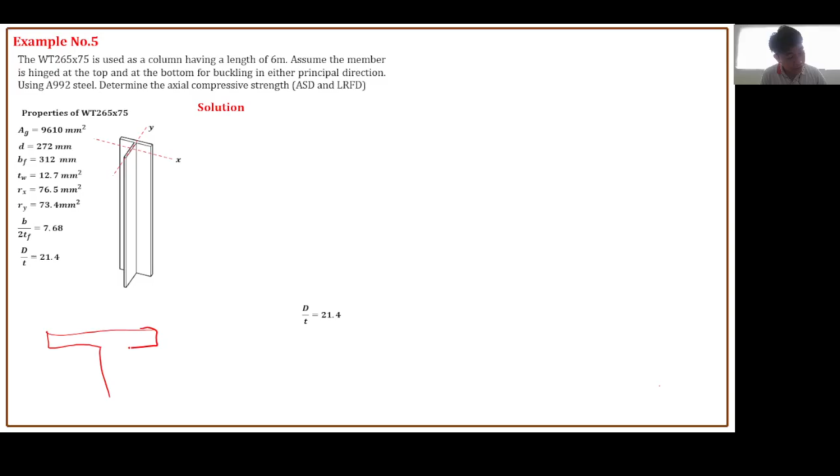And this is the overall depth over its thickness, or the thickness of the web. Okay, so now before we compute the compressive strength, let's compute first the width to thickness ratio of each element. So anyway, we have two types of element here: the flange and then the web.

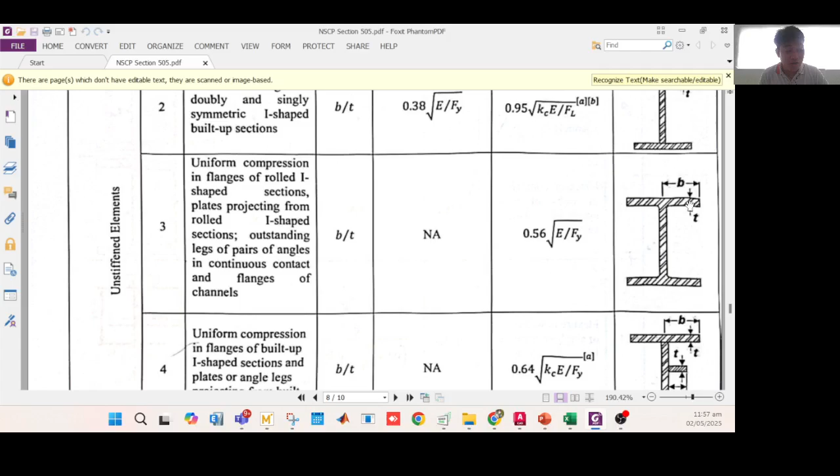For the flange, we are going to use case number 3 of this table, because from this table we can project a letter T from this letter I, or W section. So we are going to compute the B over T of the flange. As you can see here, that is half of the flange over the T, but the standard already provides the B over 2 times the thickness of the flange, or base flange. This should be base flange over 2 times the thickness of flange. You can check that on the standards.

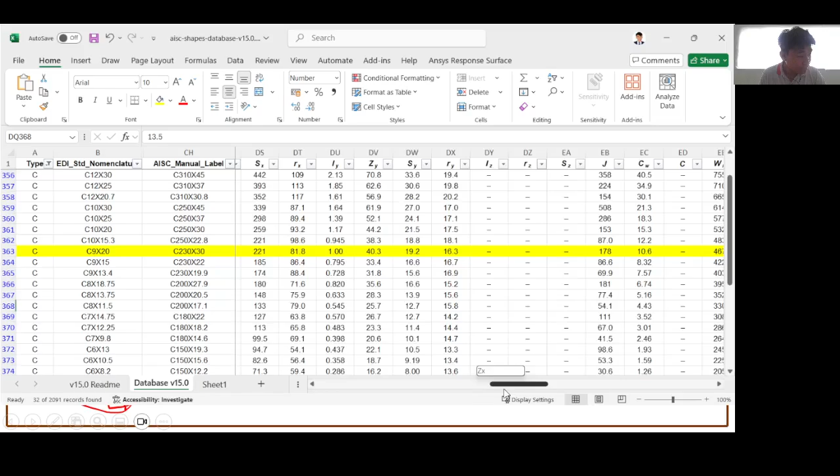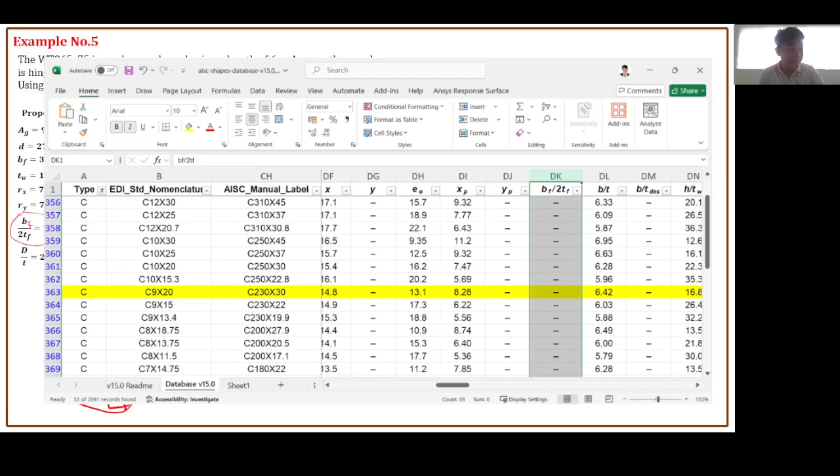So that is there. Okay, so this one, BF over 2TF. So this is the value from the table, and we are going to compare that to the NSCP provision, which is 0.56. Now, if this B over T exceeds the lambda R, meaning the section is slender. However, if this B over T does not exceed 0.56 square root of E over Fy, then it is non-slender.

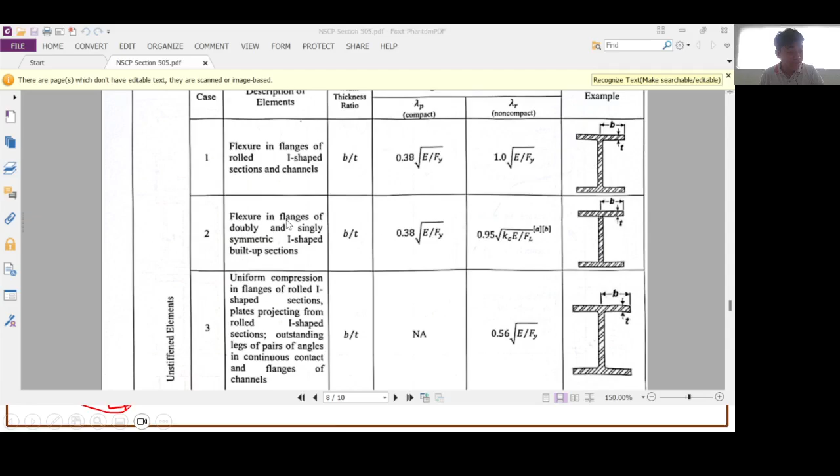Okay, so we're going to compute this BF over 2TF and compare it to this limiting width to thickness ratio. So anyway, for the web, we also have to check since the web is also an unstiffened element. That is under case number 8 of the NSCP. So uniform compression. This case 7 is for flexure, but we're analyzing compression members, so we need case number 8.

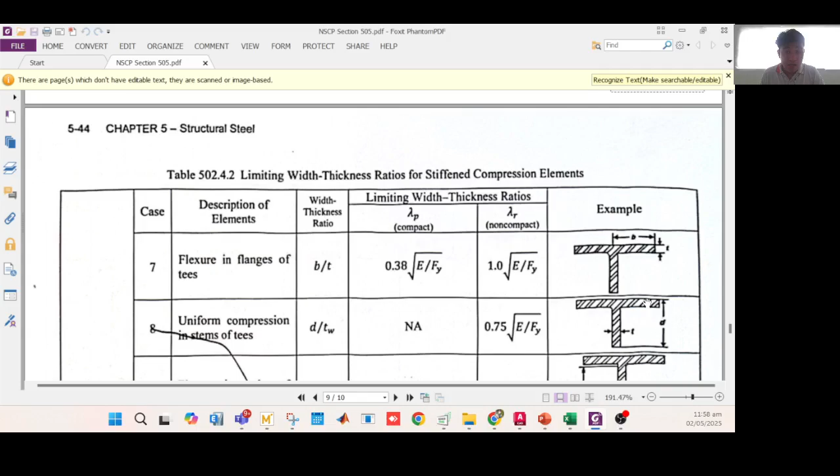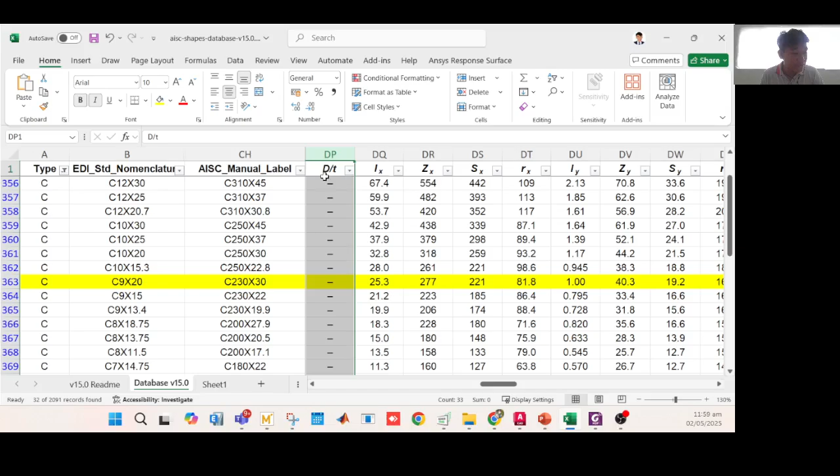For case number 8, we need to get the B over T ratio. In this case, that is D over the thickness of web, from the AISC standard. So that is capital D over T for AISC version 15 database. So you can look at this column, the D over T. But if you don't want to look at the D over T of this column, you may just solve the D over thickness of the web. It will just yield the same result.

So let's check if the result is the same. Although there may be a slight discrepancy. Okay, let's check. So we have the overall depth 272 over thickness of the web 12.7, which is approximately equal to 21.4, but the standards just use 21.4.

For case number 8, again, we are going to use this limiting width to thickness ratio, 0.75. So the D over T will be compared to 0.75 square root of E over Fy. Solving this value, we already have this value, 7.68. And then 0.56 square root of E over Fy, so let's solve that. Anyway, A992, that is 345 megapascal.

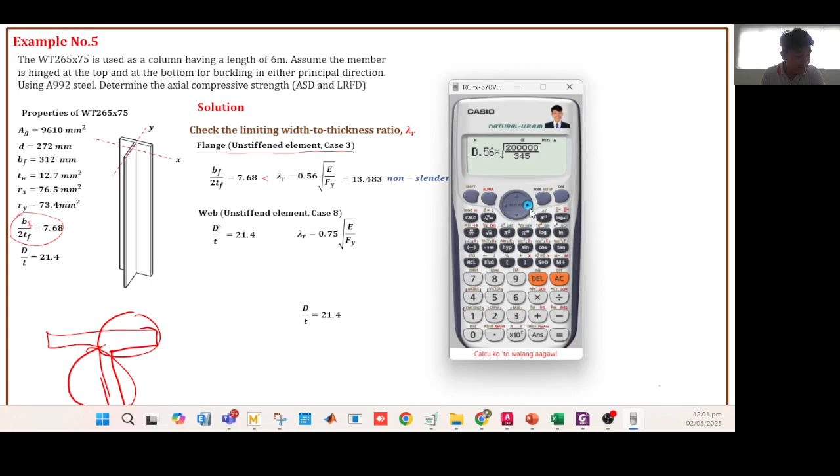Okay, now how about this one? So we have the D over T, 21.4. Let's compare this to 0.75... so that is 18. Okay, so meaning this 21.4 is already greater than the ratio for the web. Now we're talking about the web, which is also an unstiffened element. Okay, both flange and web are unstiffened elements.

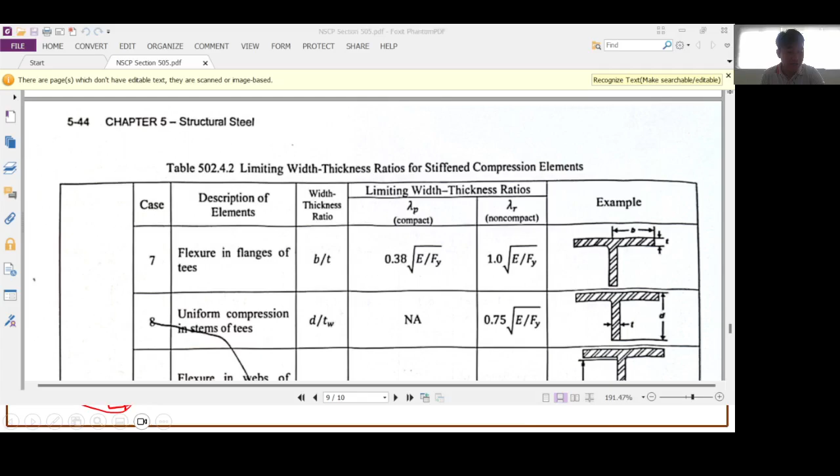Okay, so unstiffened elements are those elements which are not supported on both ends. When you say stiffened, both ends are supported, such as the web of the W section. Now, for this case, the D over T is greater than the limiting ratio, meaning this is already a slender element. So identifying if the elements are slender or non-slender could help us determine which formula should be used in solving for the nominal axial strength, because as per NSCP, for sections without slender elements, we can use section 5.

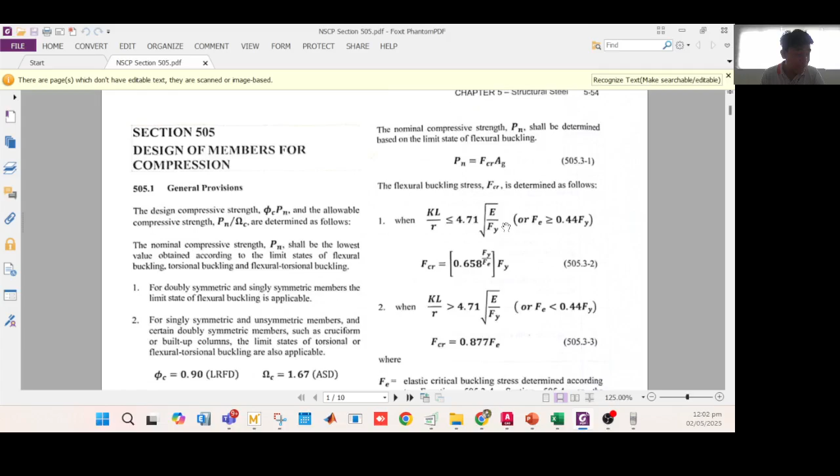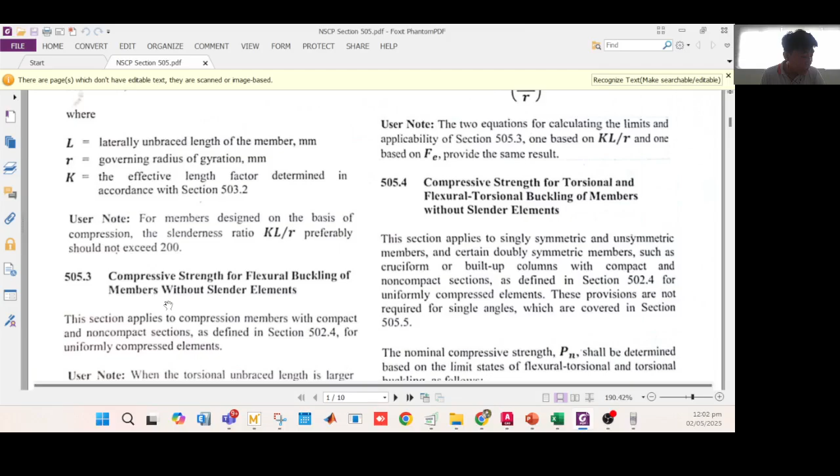505.3 is without slender elements. However, with slender elements, you have to use this provision of the NSCP. So this one is without slender elements, and this one is with slender elements. Since we have unstiffened slender elements, we're going to use provision 505.7.

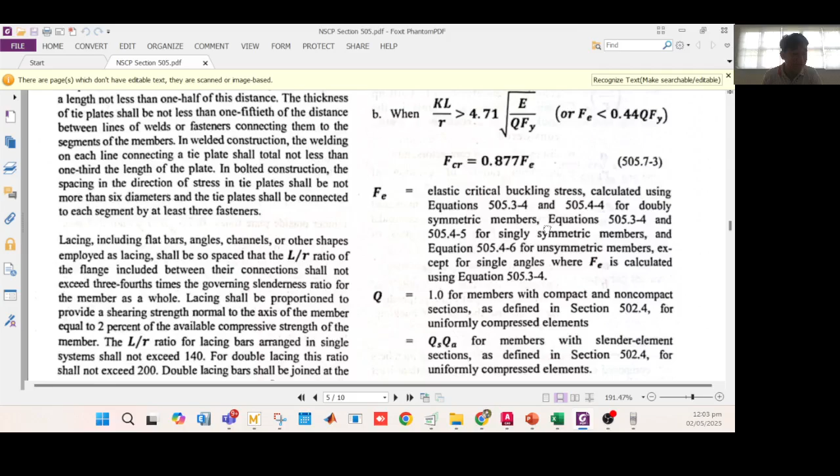Now, in solving for the PN, we need the FCR and area of the gross. We already have the area of the gross. Okay, then FCR, how do we solve the FCR? So FCR...

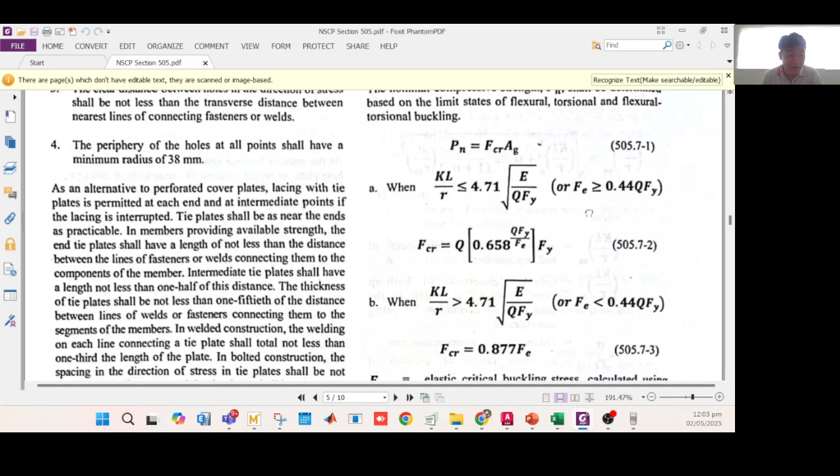It's either from this equation or this equation. It depends on the critical slenderness ratio compared with 4.71 square root of E over Fy. Or you may compare this, if Fe is greater than 0.44 Q Fy, we can actually solve the Fe, elastic buckling stress. So for elastic buckling stress, we're going to use 505.3-4 and 505.4-4, for doubly symmetric members.

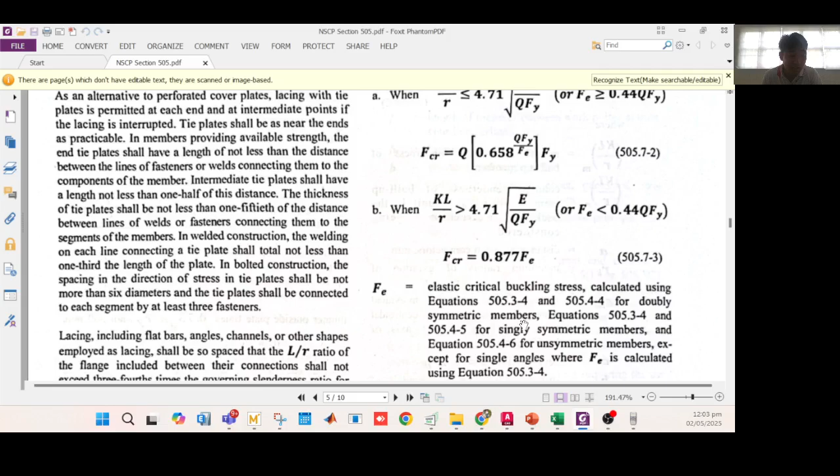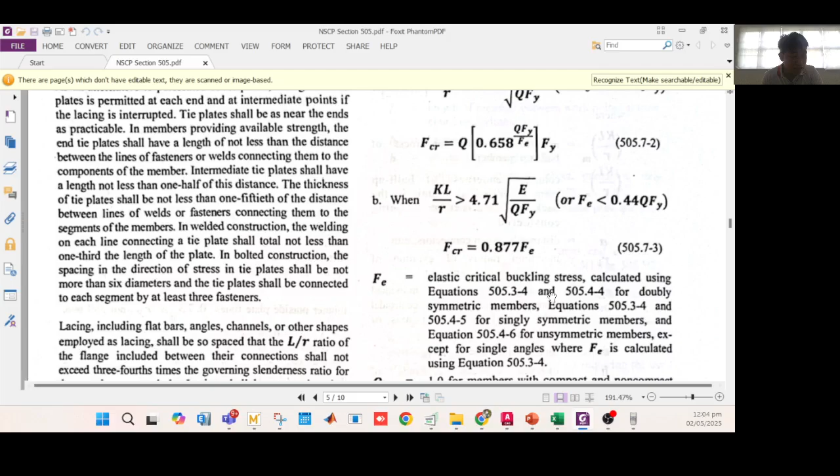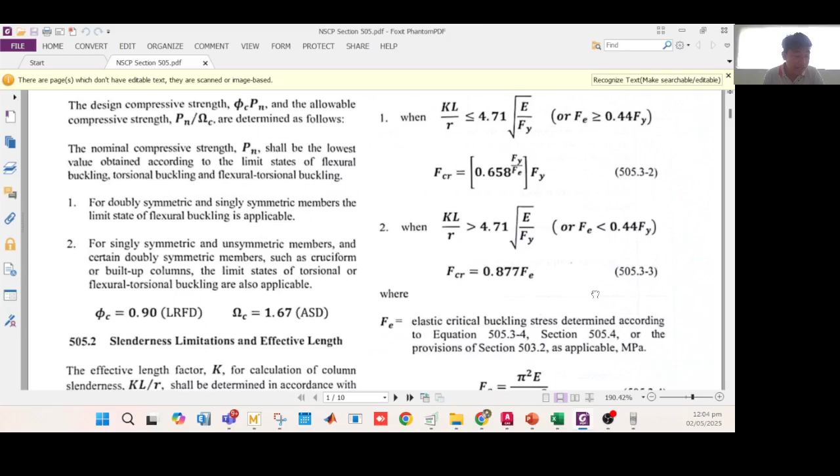Now equation 505.3-4 and dash 5 are for singly symmetric members. So let's look at 505.3-4 for singly symmetric members. So how do we calculate the FE? Let's go to 505.3-4, for singly symmetric members. So for singly symmetric members, you may use this FE, the elastic critical buckling stress.

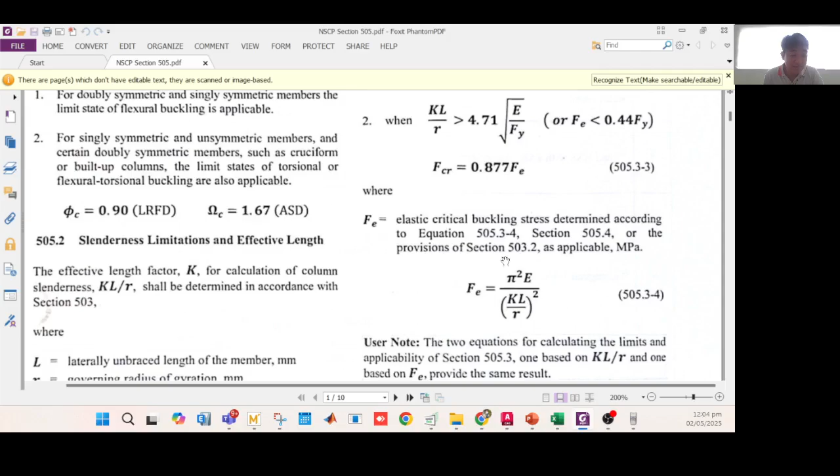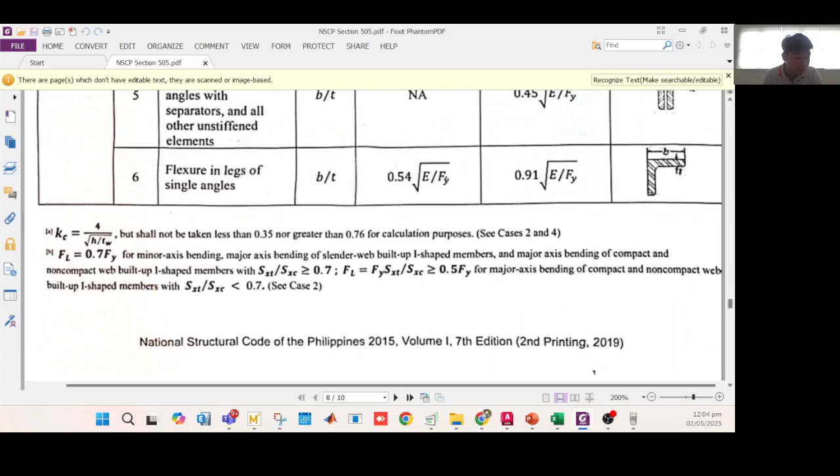So we are going to solve the FE. After solving that FE, we can now solve further. If you want to compare this, but you don't need to compare, or no need to compute the FE first if you'll be comparing these two.

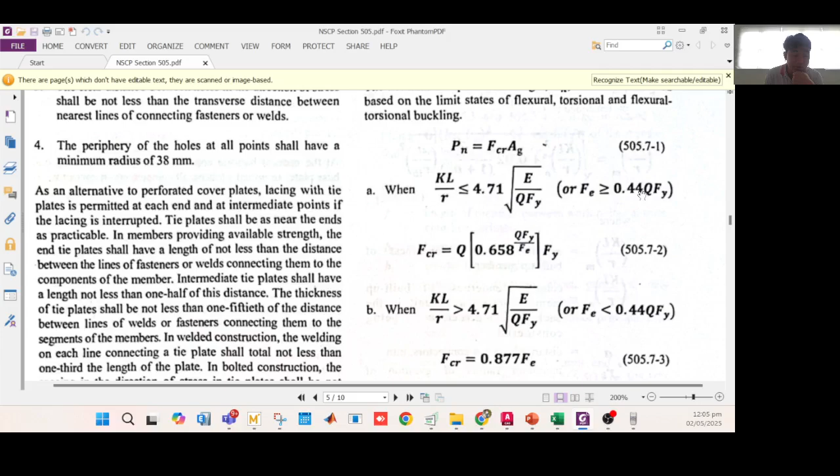But you need the Q also. Aside from FE, you also need the Q. So what is Q? Q is equal to QS times QA.

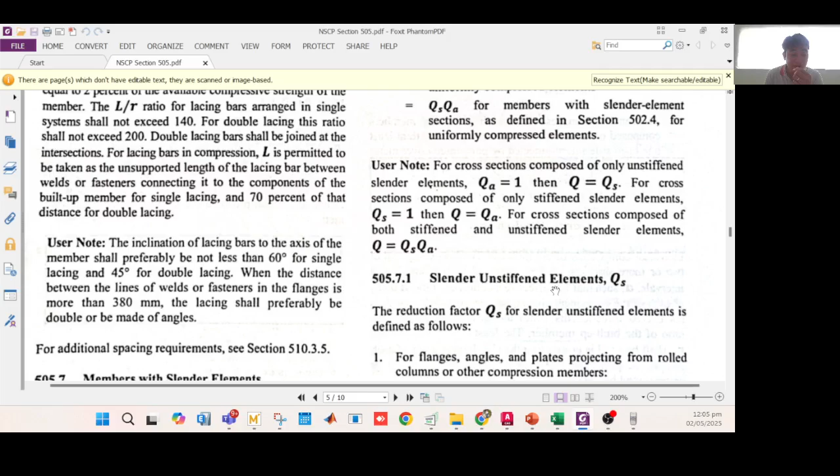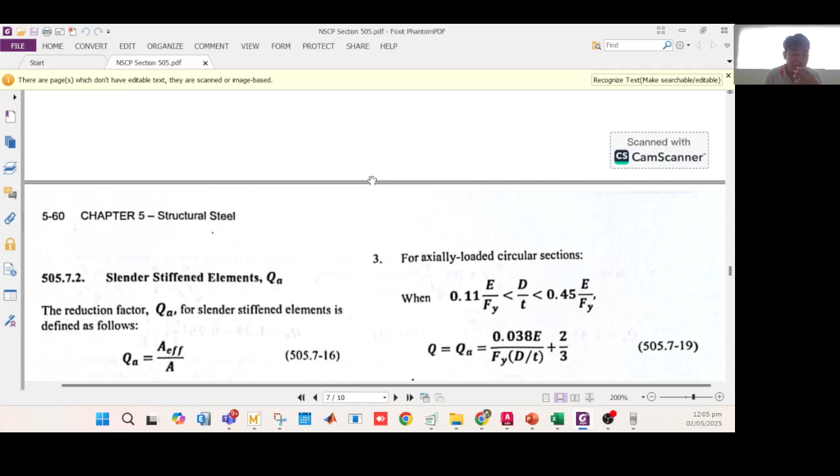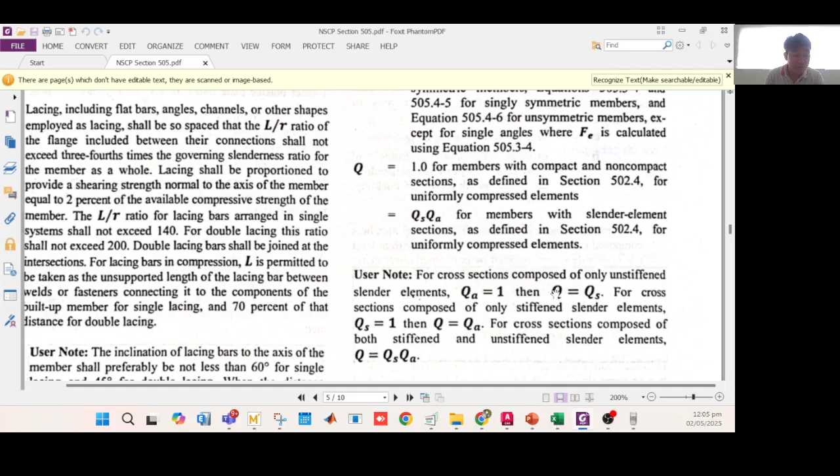Okay, so what is QS? QS is for unstiffened element, and QA is for stiffened element. Take note, class, a letter T doesn't consist of a stiffened element. So, meaning, we don't have to solve for the QA, it's just equal to 1. And therefore, you just need to solve for the QS. So Q is just equal to QS if you are not going to solve for the QA, since again, we have here a slender and unstiffened element.

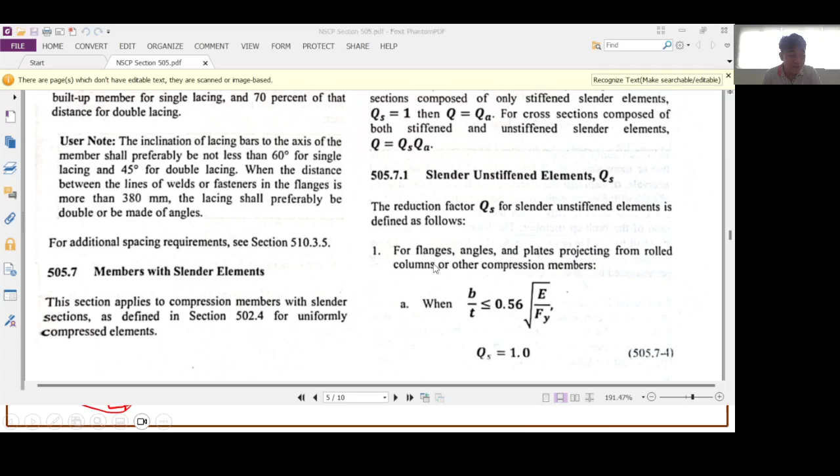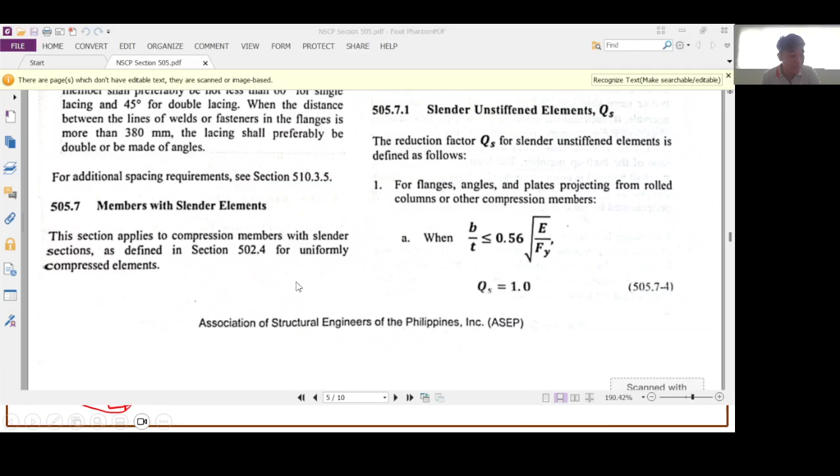So looking again at our given, we found out that the unstiffened element, which is the web, is slender. So you have to look at this section 505. We have to solve for the QS using 505.7.1, and then identify which among these, one, two, or three, will be used.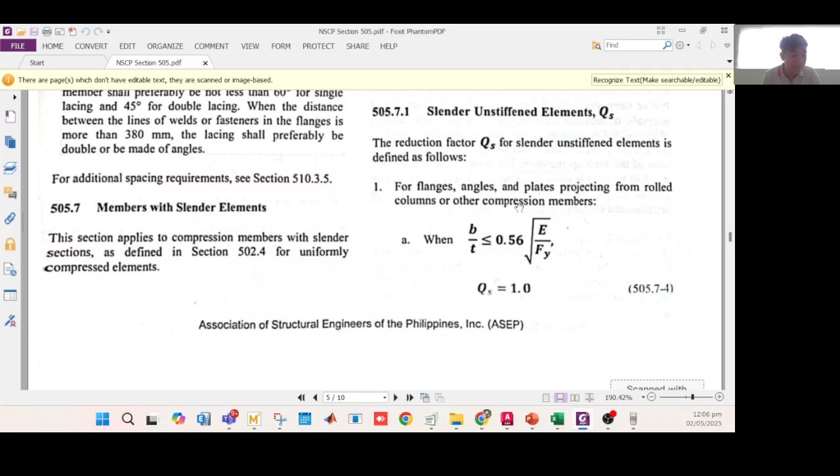Let's read where these are applicable. For number one, these are for flanges, angles, and plates projecting from rolled columns. For number two, flanges, angles, and plates projecting from built-up columns. Since letter T is a rolled standard shape, we don't have to use this one and two. Actually, there's a specific provision for letter T's. These are for single angles, and this one is for the stem of T's.

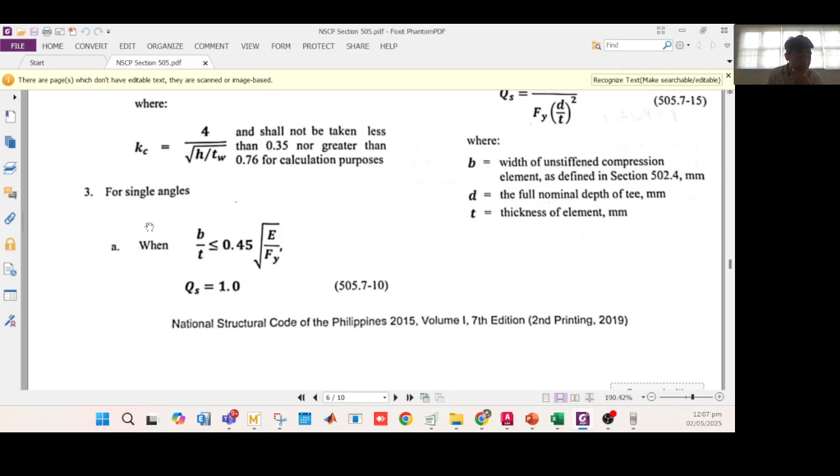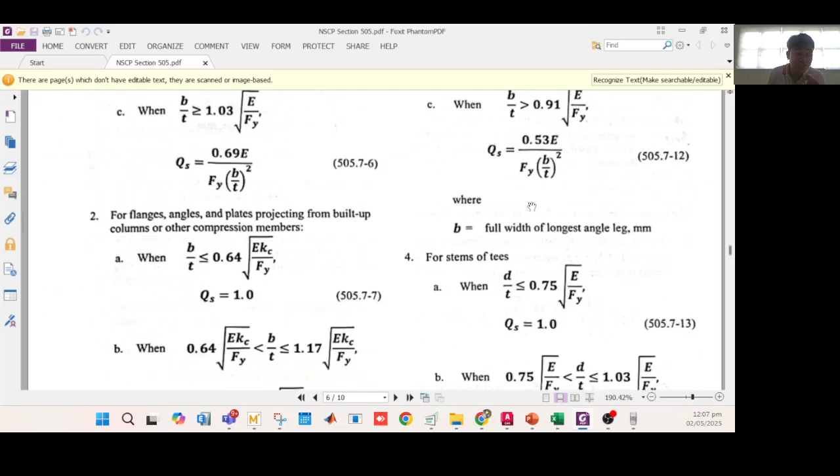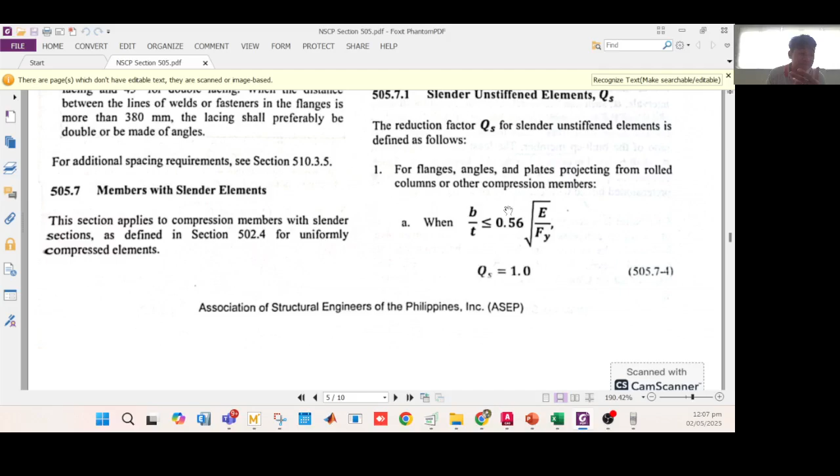Since we found out that the slender element is the stem of T's. Now, if the slender element is the flange, you have to use this instead, for flanges projecting from rolled shapes. This is from case number 3, since case number 3 is for letter I, projecting from roll, and you have to solve the slenderness or the compactness of the flange. If you found out that your flange is slender, you're going to use number 1.

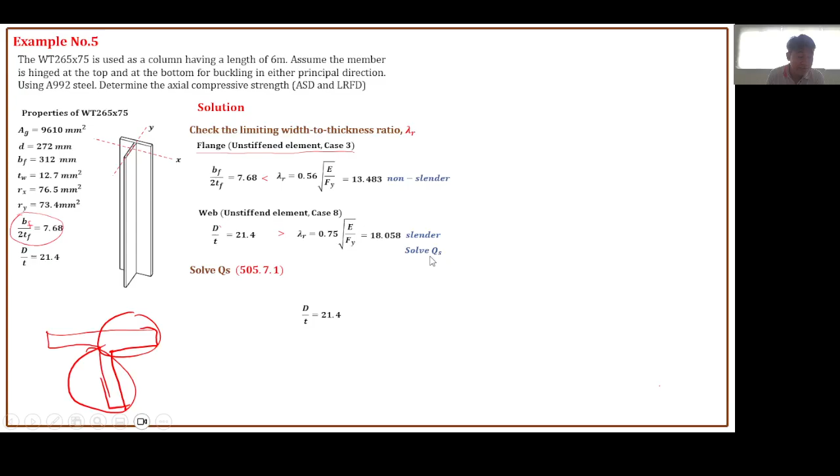But for stem of T's, since we found out that the stem or the web of this T is slender, so we'll be using this number 4 in solving for the QS. Now, if D over T is less than 0.75, QS is 1. Actually, it's D over T is greater than that. So if it's less than, in class, you don't have to solve for the QS — that is already equal to 1.0.

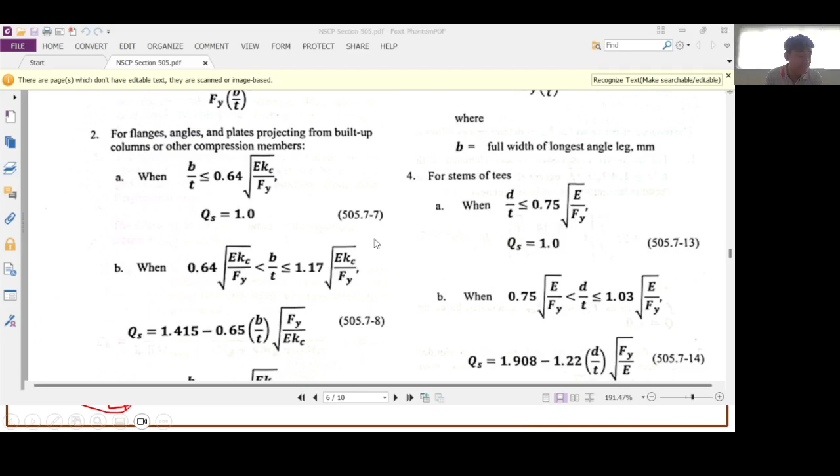Since this is greater than, obviously A is not applicable, but B or C might be applicable because we have to compare D over T with 1.03 square root of E over Fy. So we have to check if this is greater than this value, or less than, so that we can identify which formula will be used, dash 14 or dash 15.

Okay, so for stem of tees, we have to compare that to 0.75, we already got that value, and that is less than. Then we compare that to 1.03 square root of E over Fy, and that is equal to 24.799. So we can see here, the D over t, which is 21.4, is greater than 0.75 square root of E over Fy, but less than this value. So therefore, we have to use letter B of number 4.

So this formula will be used to compute the value of QS, 505.7-14. The formula is 1.908 minus 1.22 times D over t, which is 21.4, then the square root of Fy, sorry, that should be Fy over E.

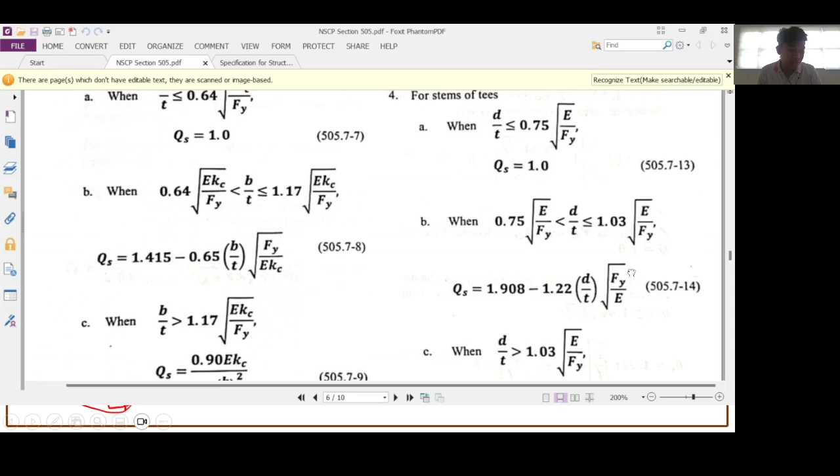Sorry class, it should be instead. It should not be equal to E, it should not be E over Fy, it should be Fy over E. Again, following the code, it should be Fy over E. But when comparing, you should need E over Fy. But for solving QS, it should be Fy over E.

So substituting, that will be equal to Fy over E, 345 over 200,000. That is equal to 0.824.

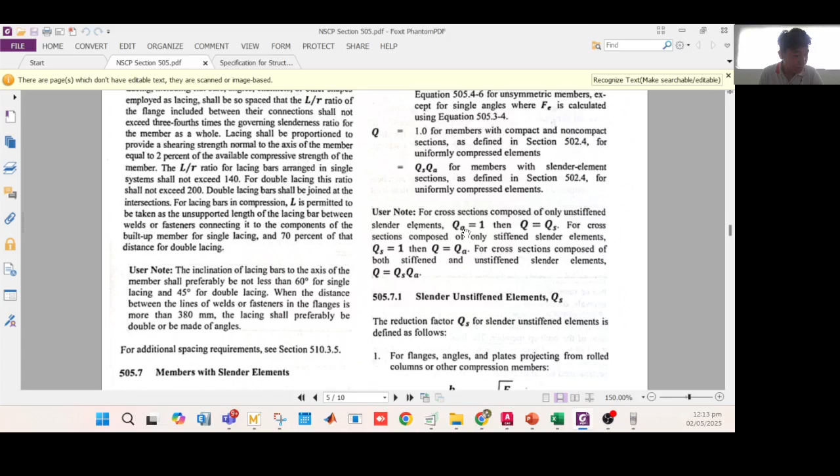Next, we already have the value of QS, and that will be your Q. So again, we need the Q to compare, that will be used later on in solving the PN. So from this code, we need the Q. As you can see here, Q is always multiplied to Fy, so QFY, QFY, so we really need that value of Q. And that Q must always be less than 1.0.

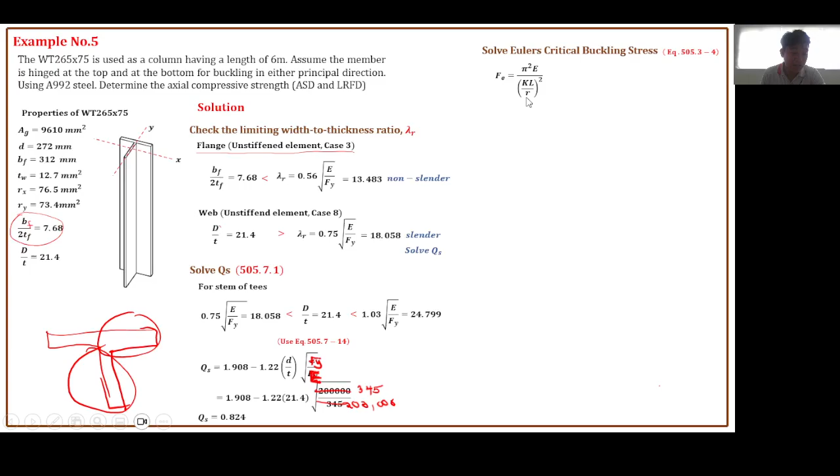Okay, so now we solve the FE. Again, we need to use this 505.3-4. So for single symmetric and double symmetric, this is also being used now. So pi squared E over KL over R, squared. Okay, so we have the KL over R slenderness ratio. So you have to select the critical slenderness ratio between the X and Y axis.

So how can we identify that? If the overall unsupported length is the same for both axes, just look at the Rx and Ry, whichever is smaller, meaning that is the weaker axis. As you can see here, Ry is only 73.4, thus that is the weak axis. So we are going to use that Ry for the critical slenderness ratio because the y-axis is very weak compared to the x-axis.

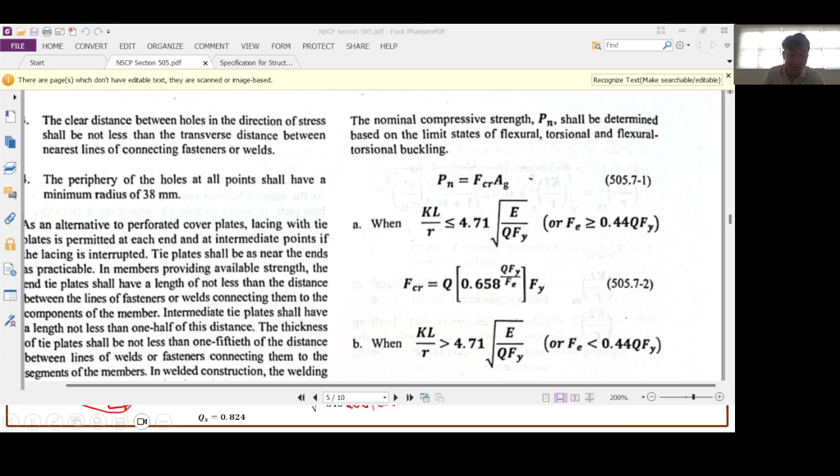So substituting, we have 295.406 megapascal. Okay, so we can now solve the compressive strength of the column. So that, it depends. Before solving the PN, we need the FCR first.

Again, FCR depends on the value of KL over R compared to 4.71, or you can compare this. It's up to you. So you may use this for comparison or this one. Now for this problem, instead of using 4.71, I'll be comparing 0.44 QFy.

Now again, your Q here is 0.824 because we don't have to get the QA, because we don't have any stiffened element here. So QS is just equal to Q. So solving this value, we have 125.031.

Comparing that to your FE, FE is 295, meaning FE is greater. So it should be greater than, no? FE is greater than 125. Yeah, if we have an FE greater than 0.44 QFy, thus we're going to use this formula.

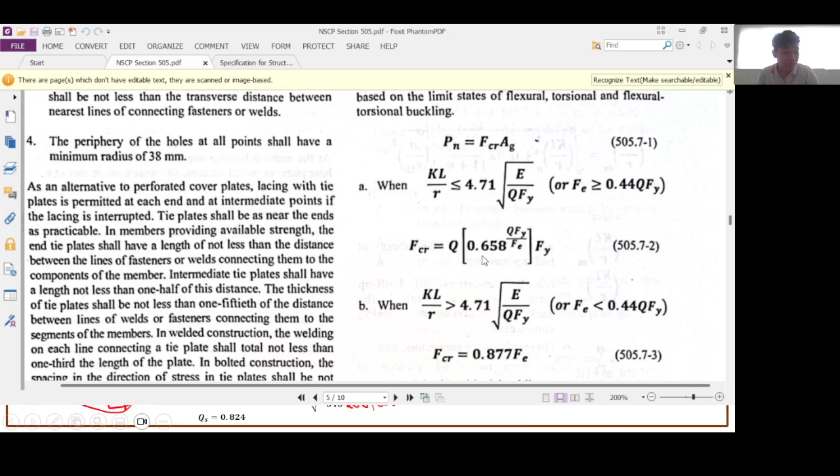505.7-2, okay, so we'll be using 505.7-2. So this is your formula. So let's substitute Q 0.824. So 0.658 to the power of QFY over FE, FE is 295, and then you have the Fy. So then the FCR will be 189.981 megapascal.

So with that, you can now solve the PN. That is just FCR times area gross. So 189.981 times 9610, the area gross. So we have the nominal strength of the column.

So nominal lang yung class for the LRFD, this is the nominal capacity for the flexural limit state. Where in fact we have two limit states for single symmetric, the torsional and the flexural. But for this, we're just considering the flexural.

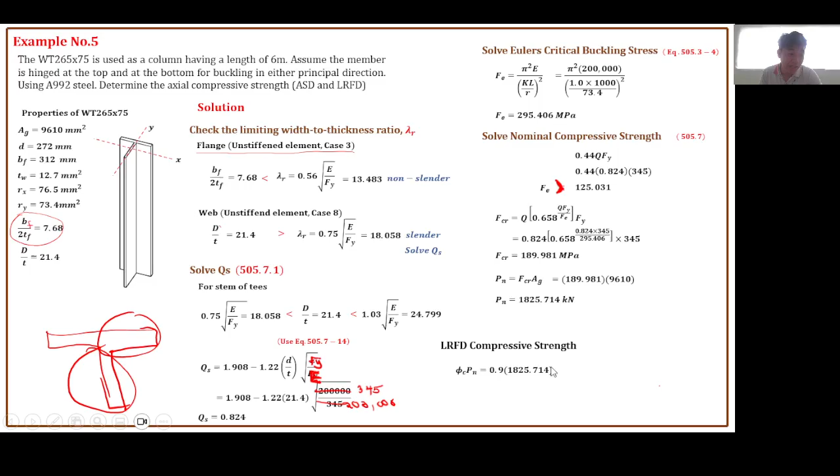Now we are now going to solve the LRFD and the ASD for the flexural capacity. For the LRFD, we just need to multiply the PN by 0.9, so your answer is 1643. And then for ASD, you divide the nominal by 1.67.

That's it, for an element or for a slender element with compressive member with a slender unstiffened element. Okay, so thank you guys for listening.